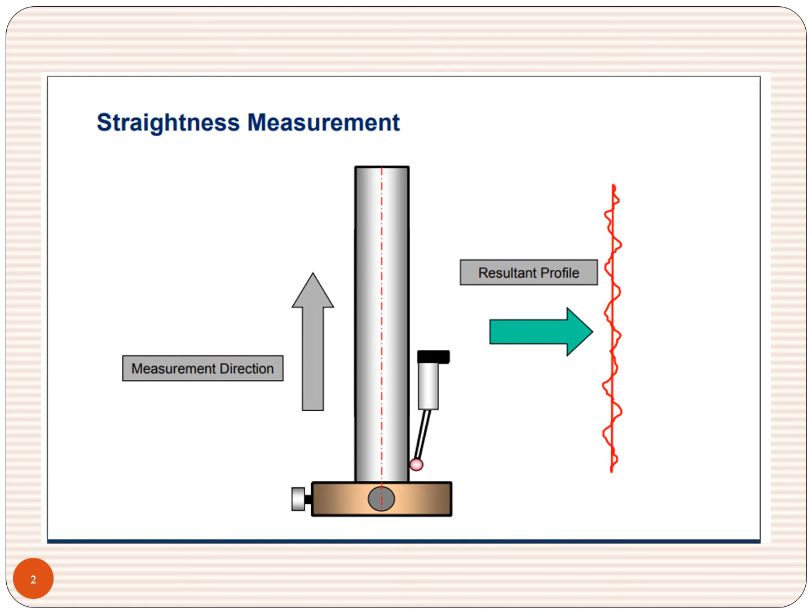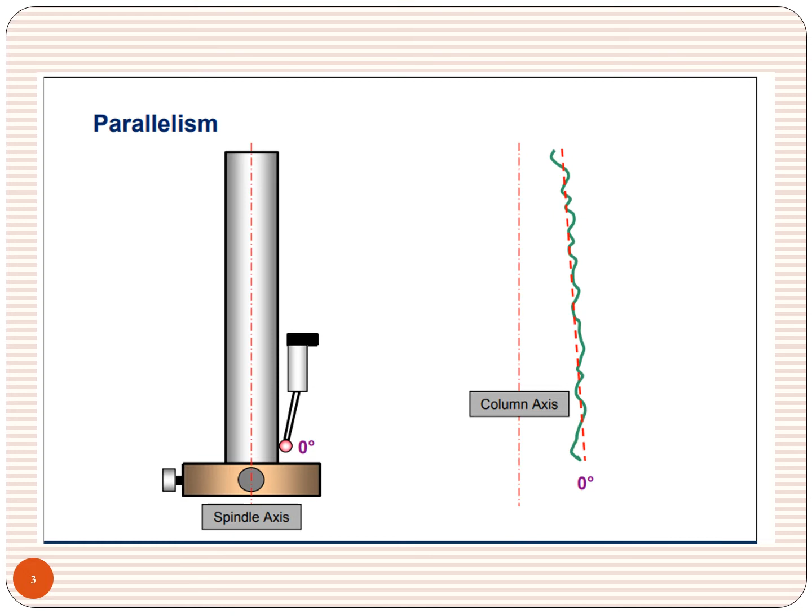Similarly, look at this parallelism. It is a single side parallelism. In the next slide, we will be seeing double side. Here also, by using the stylus, we are moving up and down, and we are checking that it is not parallel. The error is there. The spindle axis and the outermost contour layer, that is the circumferential contour layer, differ by 1 or 2 degrees. So that can also be measured by using this method.

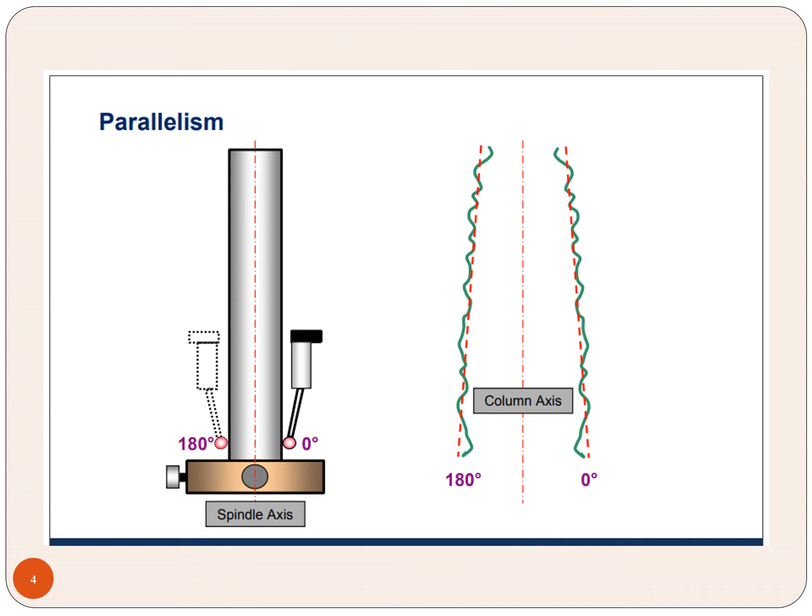This is double side we are measuring of a cylinder, and we are finding the circumferential error. So the parallelism is not there. Even for cylinders, we have this much error. If you are going to manufacture gear teeth, you use the machine called gear hobber, or a shaper also we can use. Mostly we will be using the gear hobbing machine to generate the gear teeth.

For making the cylinder itself, we have found the straightness and the parallelism have some minor error. Look at the formula for finding the parallelism: D1 minus D2. Maximum minus minimum gives the parallelism error. That is, parallelism is not perfect. It may be 0.001, that is 1 micron. But that is negligible if it is within the tolerance limit.

Even for a cylindrical rod, we are measuring the parallelism and the straightness. Why don't we measure for gear? That is the question that arises. That's why we have gone for gear teeth measuring and checking the terminology of gears. Mostly we will be discussing spur gear.

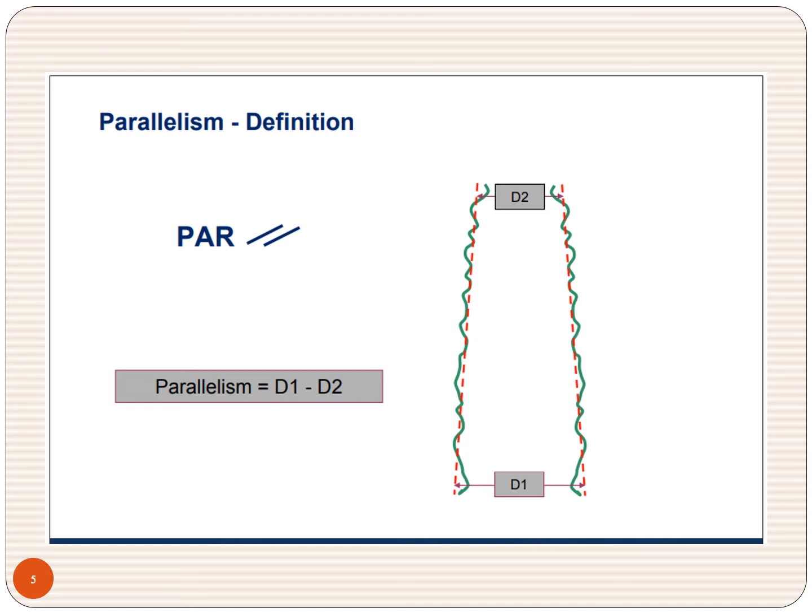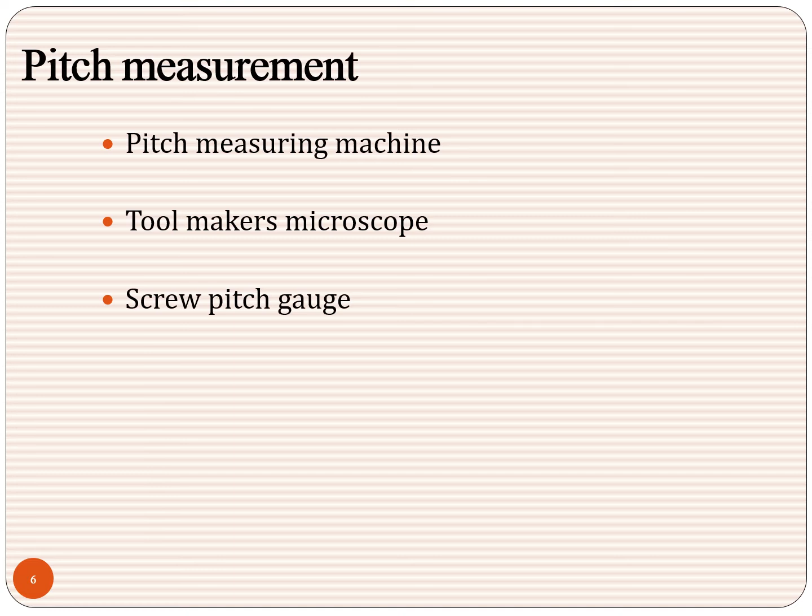So now look at this pitch measurement. As we have seen in threads, here also we have the pitch. We have the pitch measuring machine, tool maker's microscope, and screw pitch gauge in the case of threads. So this is called the pitch measuring machine. Now look at this. I am showing this for thread. Similarly, we will have it for gear also.

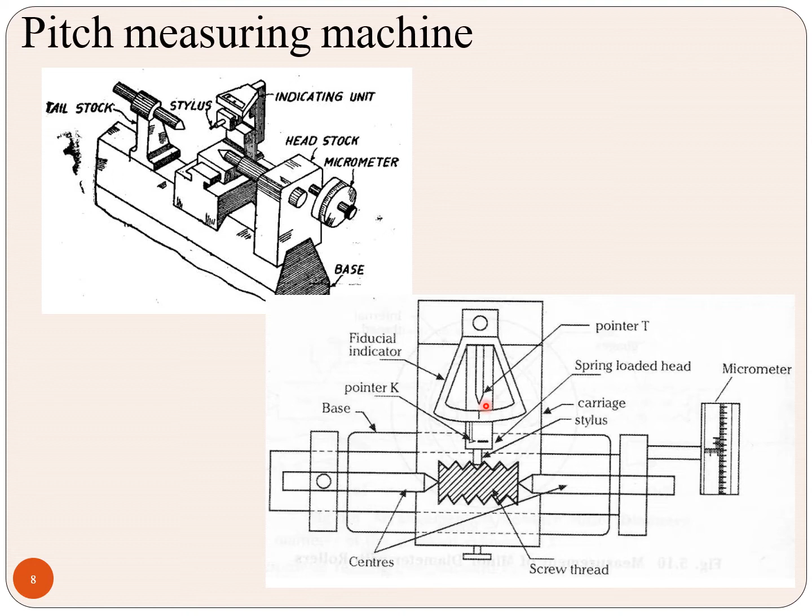This part is known as the stylus. This is the pointer. This is a carriage, and a spring loaded head. Fiducial indicator, and this is the micrometer. This is a screw thread. By means of the stylus, we are measuring the reading. This pointer will move, it will deflect. This is called the pitch measuring machine. Another one is the tool maker's microscope.

Worktable is placed on the base of the instrument. The optical head is mounted on a vertical column. It can be moved up and down. Likewise, like a microscope, workpiece is mounted on a glass plate. A light source provides a horizontal beam of light, which is reflected from a mirror by 90 degrees upwards towards the table.

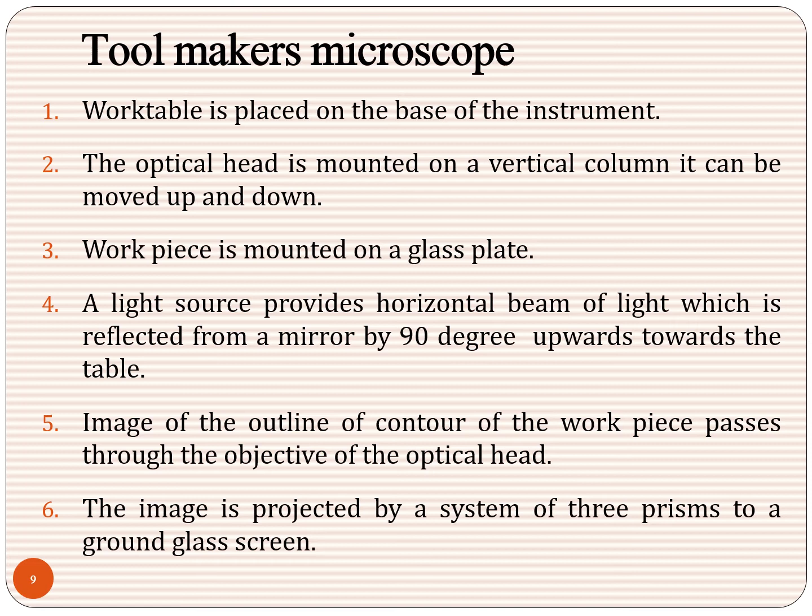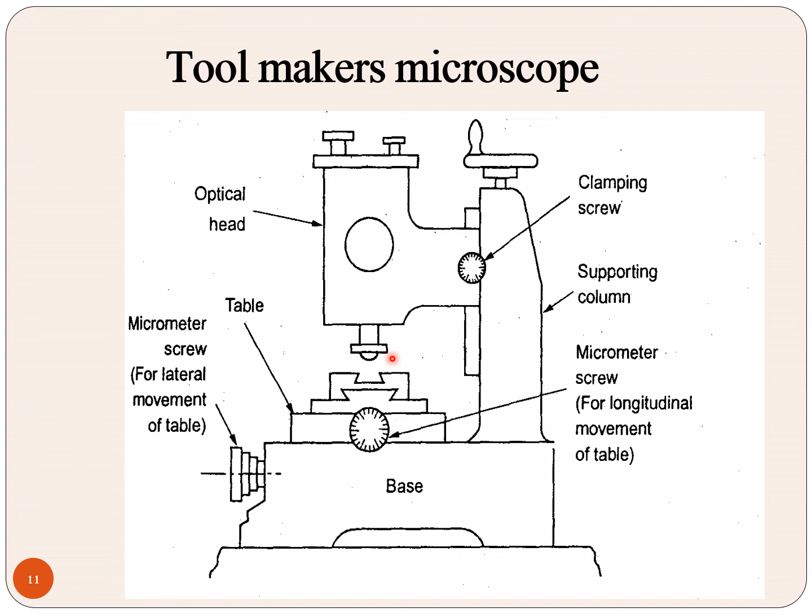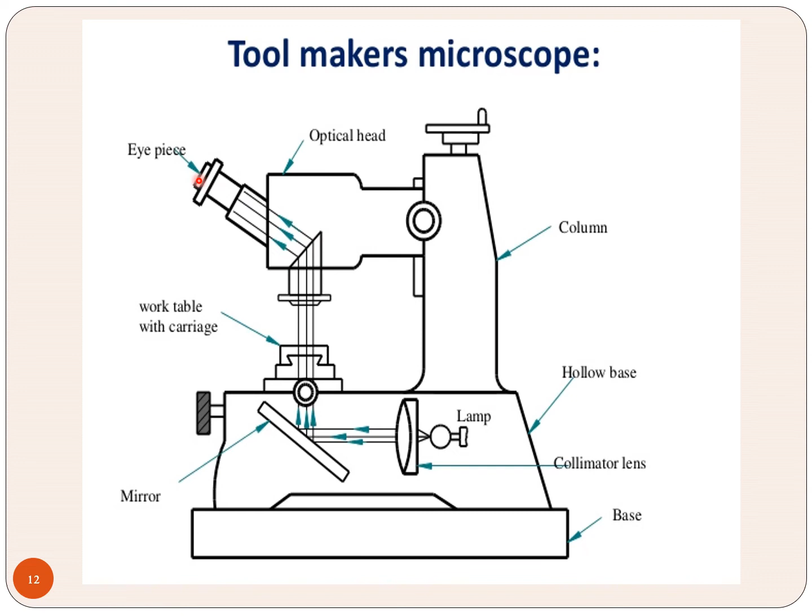From the lamp, the rays are falling on the mirror. From the mirror, it gets reflected, and through another reflector, we are viewing through the eyepiece. Then we will do the calculation and we will find the pitch. See here, look at this toolmaker's microscope, how it is going to work.

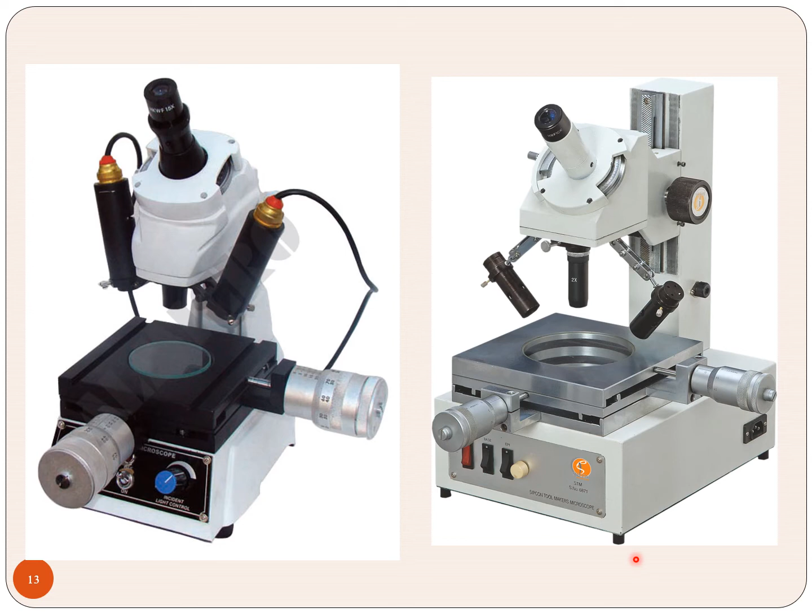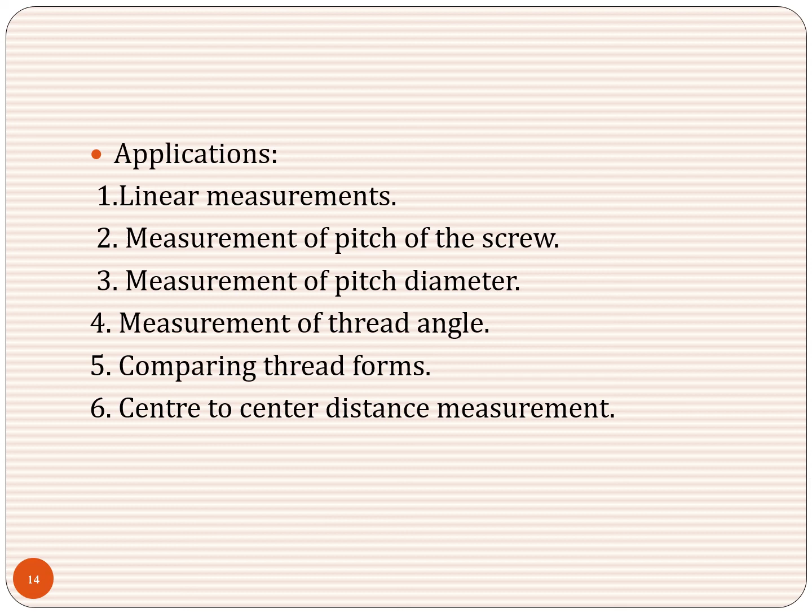The applications are to take linear measurements, measurement of pitch of the screw, measurement of pitch diameter, measurement of thread angle, comparing thread forms, and center to center distance measurement. For all these things, we can use the toolmaker's microscope.

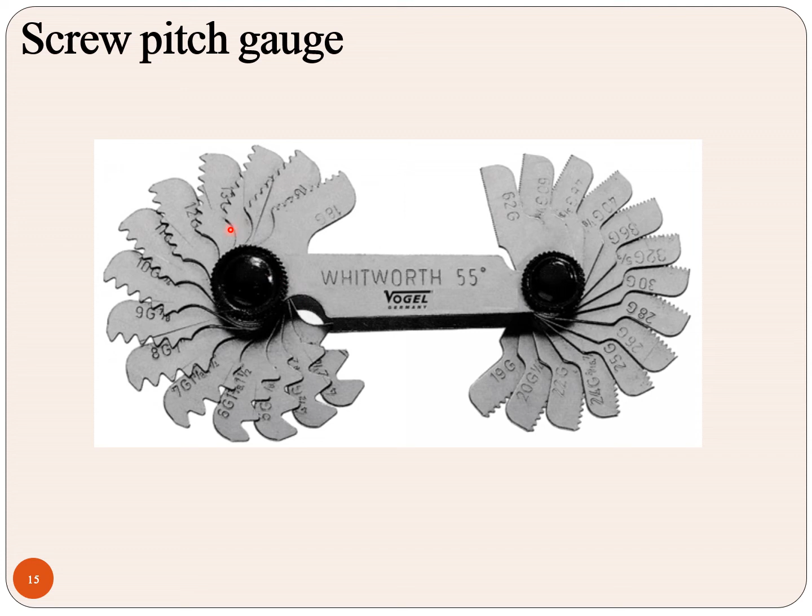Now look at this. This is a screw pitch gauge. Here we have the threaded pitch. So by using this, we can easily measure the pitch of the screw. Here they have put the marks 19G, 20G, likewise. Flank angle measurement.

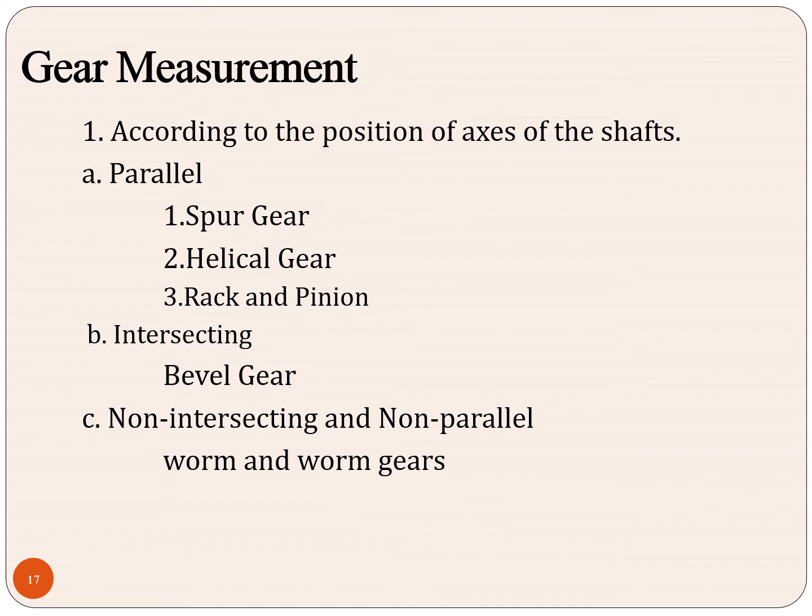See, this is gear measurement. Spur gear, helical gear, rack gear. These are the known things. Here it is a spur gear. If the teeth are parallel to the axis of rotation, it is called a spur gear. If the teeth are inclined to the axis of rotation, it will be called a helical gear. The gears are used to transmit power from one shaft to another parallel shaft. If you want to transfer the power to a perpendicular shaft, we will be using bevel gears.